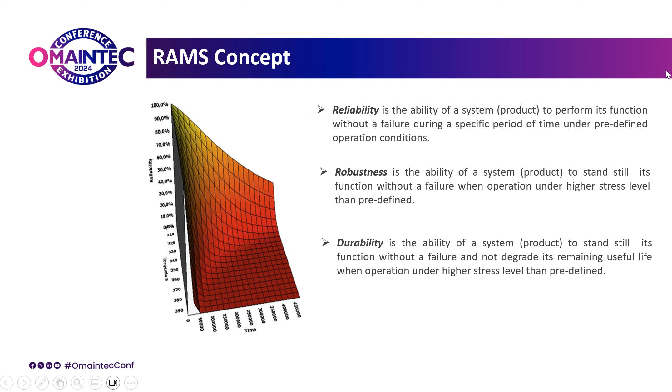Robustness is the ability of a system to sustain its function without failure when operated under a higher stress level than predefined. Durability is the ability of a system to sustain its function without failure and not degrade its remaining useful life when operated under a higher stress level than predefined. These three aspects are very important when we define and develop any products, and this also applies to infrastructure systems.

The main question that many infrastructure managers ask is why we need to implement a RAMS program for infrastructure systems. The first answer is that infrastructure systems are integrated with other systems and will affect system performance in case of unavailability or accident. This is the case for energy systems, for a nuclear power plant for example, or even bridges that can degrade.

This can cause a major accident in case of disruption. Civil infrastructure systems are safety critical by nature and may trigger major accidents in case of failure, as in the example I just mentioned about the bridge.

Communication and energy system infrastructure unavailability may cause a high impact on system availability and high loss of cash flow, and may also trigger major accidents.

Another aspect is that infrastructure systems are currently vulnerable to climate change and natural disasters, which requires a higher level of robustness. This is quite new, and new infrastructure system designers need to take into account that in the future these infrastructure systems will be vulnerable to climate change and natural disasters.

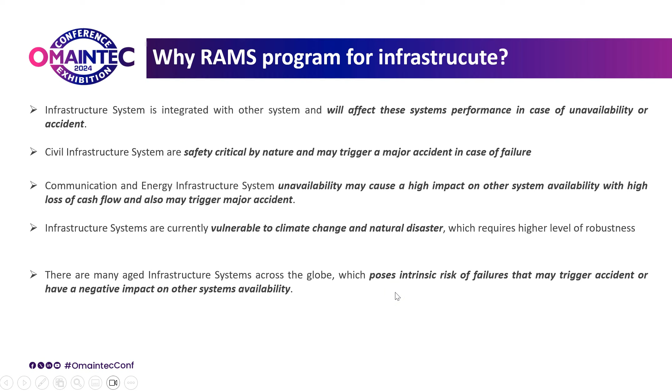Another aspect is that there are many aging infrastructure systems across the globe which pose an intrinsic risk of failures that may trigger accidents or have a negative impact on system availability. So these are the answers to why we need to implement a RAMS program.

To implement a RAMS program, the first step is to define the reliability strategy - vision, mission, goals and targets. After that, we need to have a program. A program has four pillars: reliability culture, leadership, organization structure, and resources.

Human resources - people who work in reliability, professional reliability engineers - you need to invest in. These engineers need training, need software, need to go to conferences to get new ideas, and so on. Those are the pillars for a RAMS program. If one of these is missing, the RAMS program is compromised.

In addition to the RAMS strategy and program, when you establish the RAMS program, you define all the procedures that serve as guidelines for reliability engineers for implementation. Then, as part of this procedure, are the RAMS methods that define the reliability requirements, the RAMS requirements, as well as verify if these requirements can be achieved based on the design configuration, the type of system, past data, and data provided by vendor suppliers.

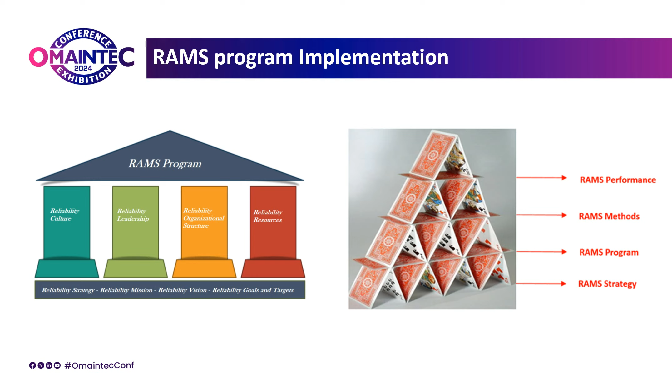And then based on it, we start to verify the RAMS performance achievement throughout the life cycle, of course in design phase, but we validate that during operational phase. It's important to understand that such RAMS methods are applied along the life cycle. In the very beginning, we define the strategy of your physical assets.

Then you develop this asset strategy and targets throughout different system levels. Then during the design phase, we start to define equipment level of concern RAMS requirements, and to do that you need to apply different reliability methods. Then you verify these targets in a lower level, and you also do bottom up and top down. First you start with top down requirement definition, but here you can start to verify your system in high level when you do some bottom analysis at equipment level.

And then, of course, during operation, whenever necessary, we implement some of this method, but currently here what you used to do is follow up your warranty terms based on performance and constantly have your FRACAS system, your reliability analysis, to verify this performance.

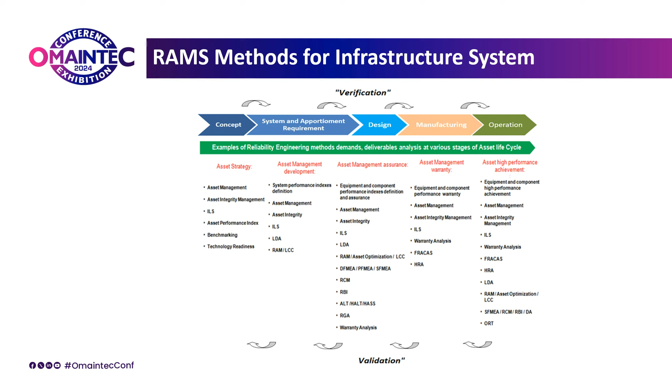A very important aspect is that such reliability methods are always linked in different phases. So the RAMS model that you do in concept phase will go in more detail at system, equipment level, and design phase. So you use this model and update it in the design phase. In the design phase here, you perform FMEA, that is the input for RCM.

And the RCM, that maintenance preventive task, will be the input for the RAMS model. And the RAMS model will be the input for the LCC. And all this RAMS model and LCC will be the base for the warranty definition and will be verified during operational phase.

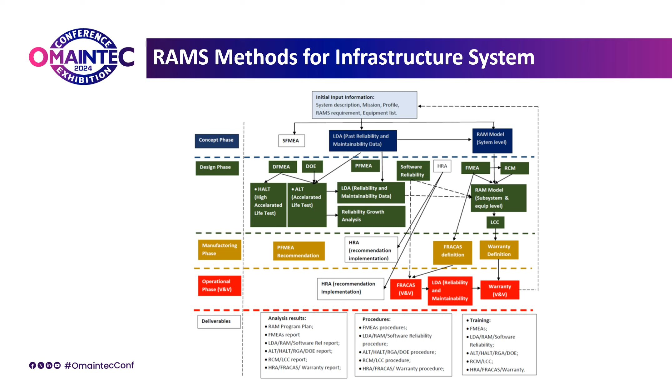Similarly, we have the FMEA that will be the basis for the FRACAS codification, and then the FRACAS will be, during manufacturing or before the operation, defined and established, to follow up the system performance during operational phase. So a very important aspect is to understand that all these methods are linked throughout the life cycle phase. So let's take a look at some examples.

Basically, we have qualitative and quantitative reliability methods applied for infrastructures. One example of a qualitative method is failure modes and effect analysis. Basically, this method identifies the system infrastructure. The subsystem is a bridge.

The subsystem has different parts here. So if you get the pier, we have a failure mode. We have a cause of the failure mode, and here you can see that we have a consequence, a possible collapse. So that's very high level, and we need to mitigate this risk based on some actions.

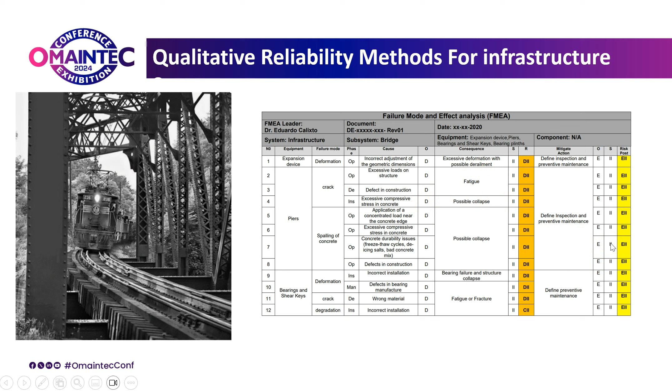In this case, we define a preventive maintenance action. Then we consider here that if we perform a preventive maintenance task, an inspection, we are able to identify these failure modes and avoid this consequence. And that's what will be the next step: that will be RCM. So we do that for all the bridge parts.

So we go through the RCM, and the RCM uses the same structure, the same definition that we had in the FMEA. And then what we basically do here is define, for example, in the case I focused on, the pier crack, I have the type of maintenance and when I will perform each type of maintenance, and at which frequency, to identify this failure mode here.

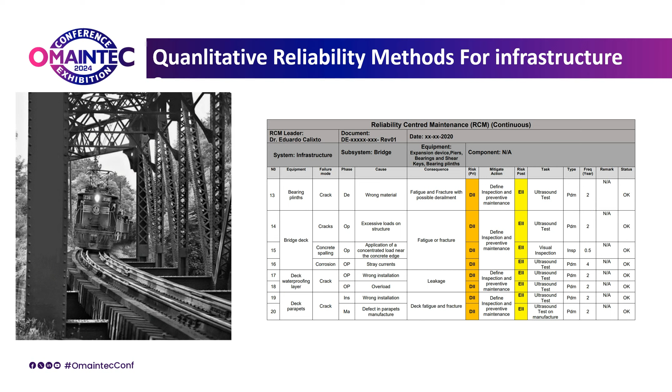And then, of course, I can use this type of task here in my RAMS model. So the RCM is applied for the whole system and uses the FMEA as a base. So these are qualitative methods. We also have quantitative methods.

So here, one example of one of the most important reliability methods is lifetime data analysis. Basically, what we have different here is that for usual components and equipment we get time as a parameter. But here we get what we call million gross tons.

Million gross tons is applied to assess the stress, the load on a track. So this is an example of a rail track. We consider along the time how the load on this track behaves. We can have a 50 kilometer track, a 10 kilometer track, or whatever, but we know the load, and based on the load, whenever we identify some failures, we identify what the load was.

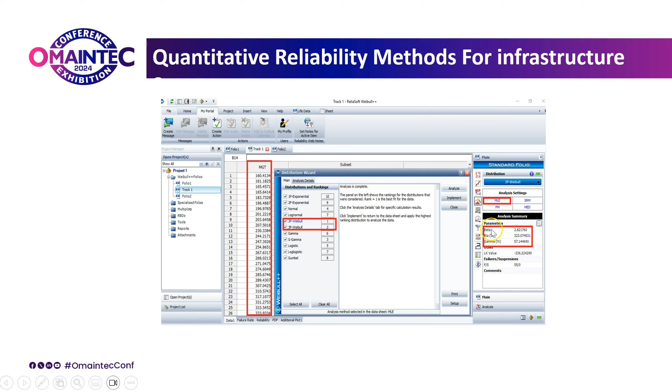And then based on it, we can basically implement a goodness of fit in the map to define which is the best PDF. Here it's Weibull, 2 parameters or 3 parameters, and here we can define the parameters. So since we define the parameters, we can automatically define the reliability along the time.

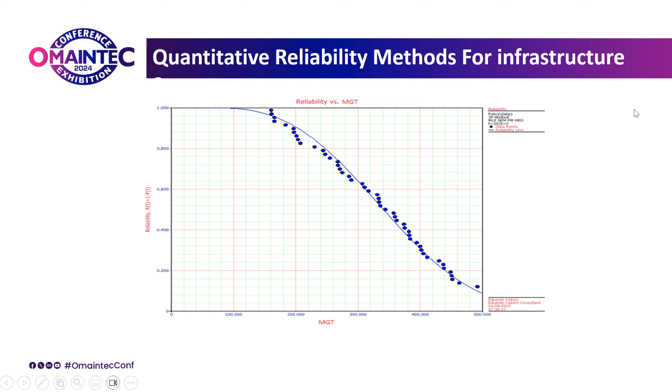Then we can see here, for example, that around 100 MGT we have 100% reliability in this track. After that, reliability starts to decrease.

Another quantitative method that we can use is what we call probabilistic degradation analysis. The difference here is that I use the input from preventive maintenance non-destructive tests, that's when I measure the crack in this track.

For example, in this case I have 5 points of measurement, and I start to measure the crack evolution. I have a limit crack that I consider a failure, that is 10 millimeters, and then of course, whenever I take a measurement, I have the MGT reference value here.

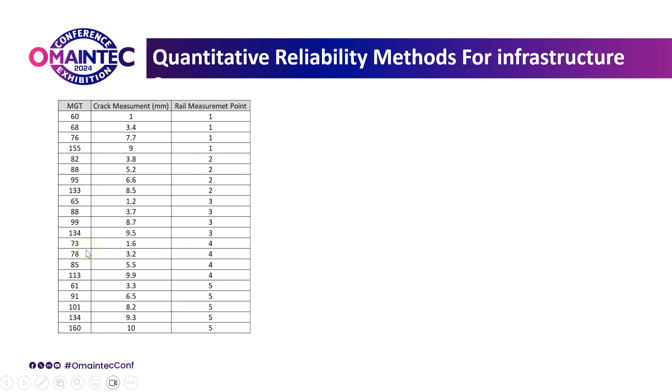So what I'm going to do now is to plot the trends that each one of these measurement points have to achieve this 10 millimeters. And then I perform a goodness of fit test to perform this assessment, and then I'm able to predict the trends for achievement for each one of these 5 points when they will achieve the 10 millimeters.

And here I have the MGT time. So for example, if here we have the limit one, and I plot the trend for each one of these 5 measure points, that's represented by 5 different colors. So if I take this example, this point here, if I plot on the x-axis, I will have the MGT value. So if I do the same for the other 4 points, I will have 5 points. With 5 points, what I can do is predict my reliability.

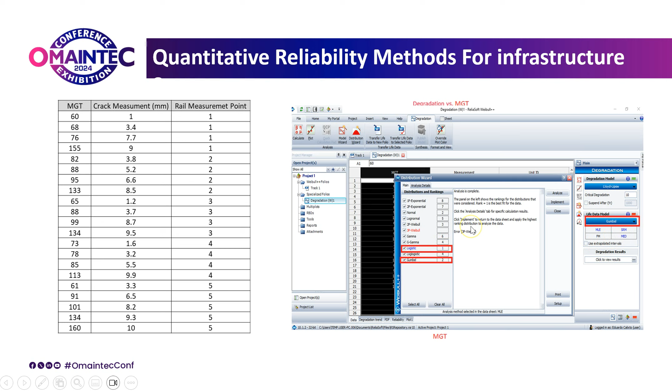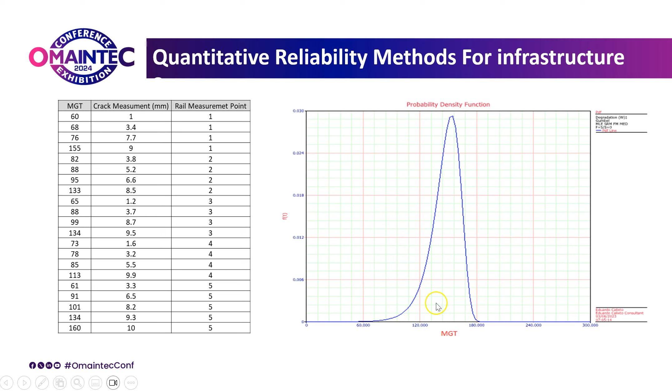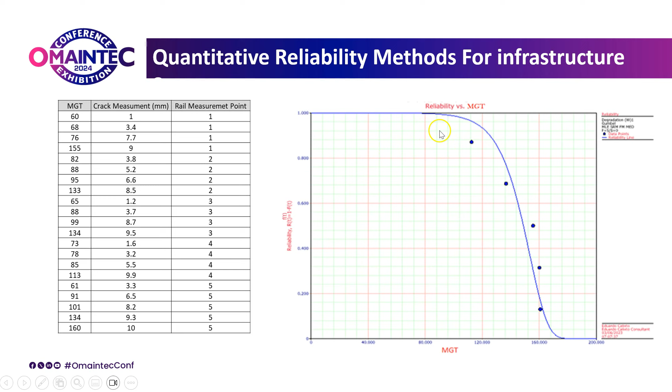So basically, I come back to the previous methodology now. With the MGT values, I perform the goodness of fit test, and I will check which are the best PDFs that fit my data, and based on it, I can have my probability density function that shows me that this is the Gumbel one, which shows the high chance to have a failure, a functional crack, in this track between 120 megatons and 180 megatons. And then of course, if I have the PDF, I can also plot the reliability, which basically shows me the probability that the system has to operate 100% until 80 MGT.

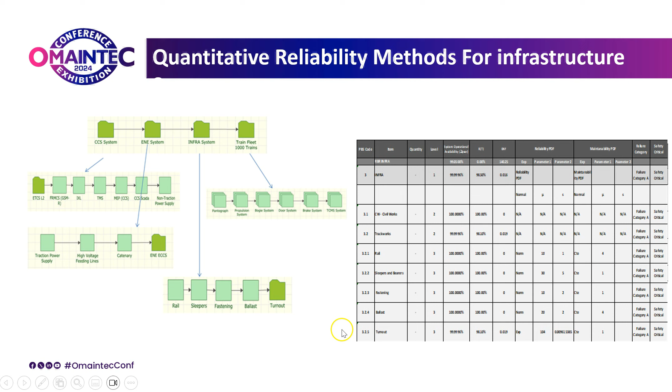Another method is of course the RAM analysis that has reliability block diagrams. Each block represents one system. This high level means my whole infrastructure system will shut down if one of the systems shuts down. And then I go deeper in this level, and then of course I'm in the concept phase. I'm starting to define my requirements, my reliability requirements, operational availability requirements, the time, the reliability requirements, expected number of failures. Then I can go deeper. So here, for example, is this infrastructure system, and I start to define it to a lower level.

Then, of course, I will perform a simulation. I input all preventive maintenance inspections, reliability, PDFs, data parameters, and maintainability parameters. And then when I run the simulation, the system will start to plot the failures, or if I have preventive maintenance, when the preventive maintenance takes place to avoid the failures. In the end, I have the number of shutdowns, and that's how the system calculates the reliability.

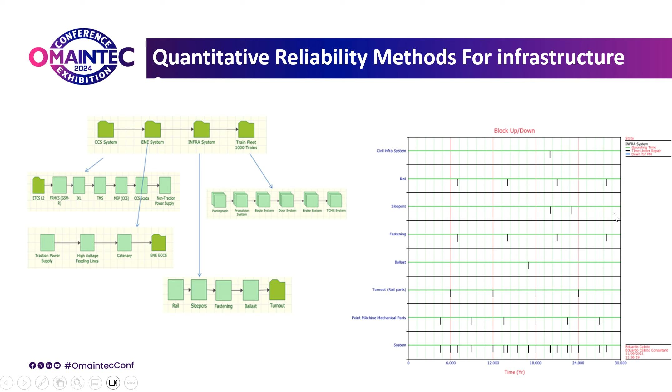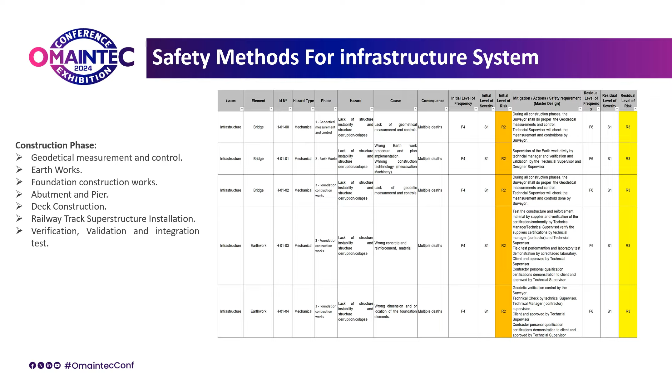And then to mitigate that, we need asset integrity management. And this asset integrity management is a combination of safety management, risk management, as well as maintenance management, that's including reliability. So we have here preventive maintenance and reliability inspection tasks, and we also need to consider the human factor of our teams to avoid human error that can trigger a major accident.

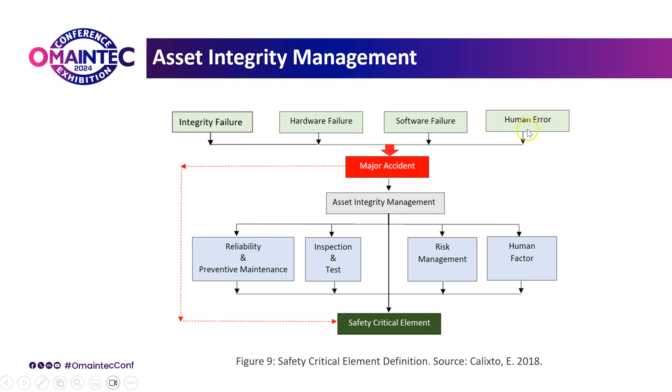And those are the elements that we have in asset integrity management. Another very important aspect is that nowadays we are able to incorporate artificial intelligence to measure the performance of our integrity systems, infrastructure system integrity.

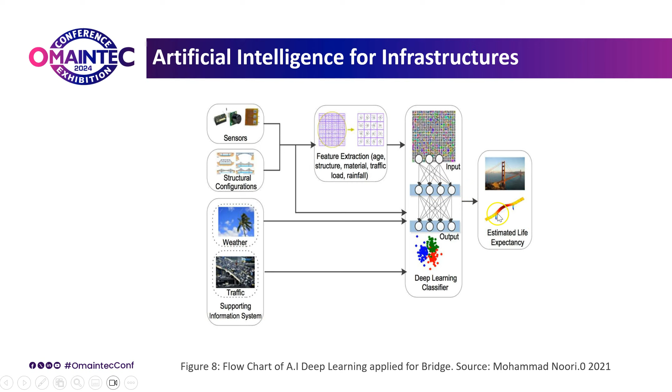So we need to incorporate artificial intelligence as part of asset integrity.

Whenever we have failures, degradation, or incidents, we put this information in our failure reports. Then we have a summary in our anomaly management system. We classify the risks for each anomaly, and we prioritize actions. And of course, in terms of safety, we have a defined barrier system.

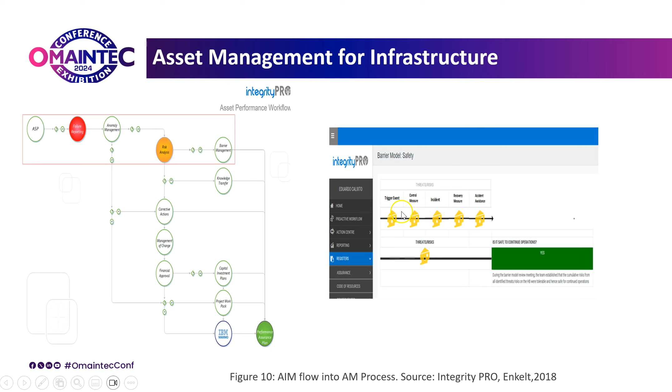The barrier system will be able, for all critical elements, to mitigate and to have a graphical vision of the impact of the system.

Then, as defined before, we have a list of inspections. This is an example for a railway system that we need to perform along the time, and we check and manage that along the operational phase.

Additionally, it's very important that we have our prognostic health management, monitoring critical safety elements and the remaining useful life, the states of health, and in addition we have reliability 4.0.

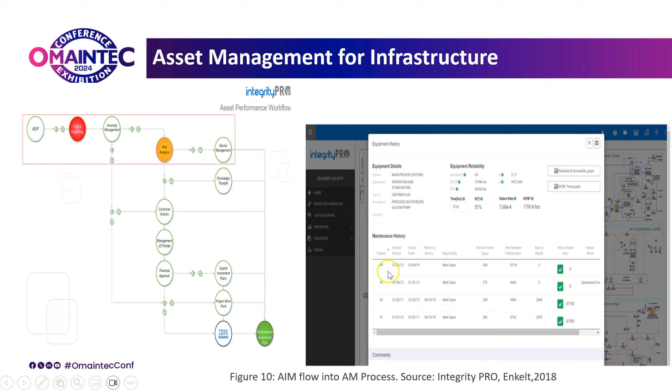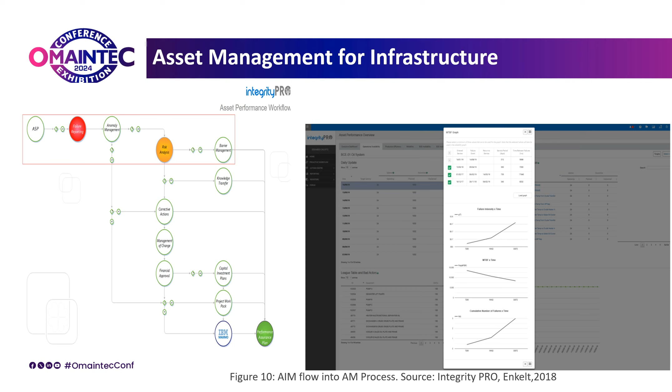That's basically whenever we have data in our FRACAS system, the system will be able to automatically calculate the reliability index and plot the graphs. That avoids complex calculations, using different software and so on during the operational phase, and it's easier for technicians and operators to understand. You don't need to calculate the reliability because it's automatically calculated.

So let's jump to the conclusion. RAMS program implementation for infrastructure systems requires a culture for excellence and high performance achievements. For infrastructure systems, or any other system, this excellence culture to develop reliable, robust, and durable products that have high performance and no early life failures is very important.

Without this culture of excellence, there is no culture of reliability. Reliability and excellence are strongly associated. The second point is RAMS program implementation for infrastructure is still a huge challenge, due to lack of risk perception and the belief that such systems will never fail.

That was one of the points where I strongly faced resistance when I worked here in Europe on a major infrastructure system project. High level organizations have this belief that the infrastructure system will never fail, or will hardly fail, and because of that we don't need to invest effort in RAMS program implementation.

Another aspect is that RAMS program implementation starts from strategy definition, vision, mission, goals, and thereafter the RAMS program elements must be constantly supported by high-level leaders and the organization.

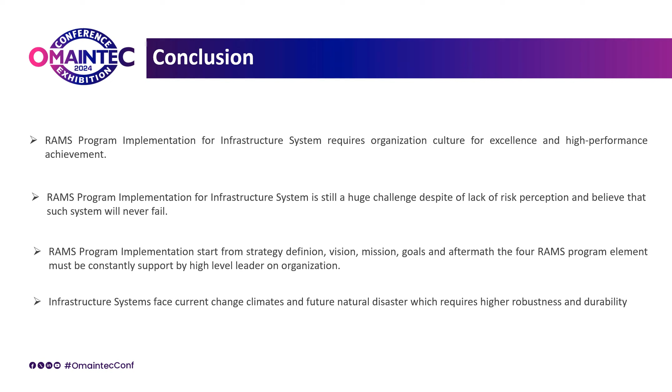Unfortunately, the old school mindset in many projects is that you need to deliver the project as fast as possible to make cash flow. But unfortunately, if you want robust and durable infrastructure systems that will face this climate change and future natural disasters, you need to spend more time designing, more people, and of course more investment.

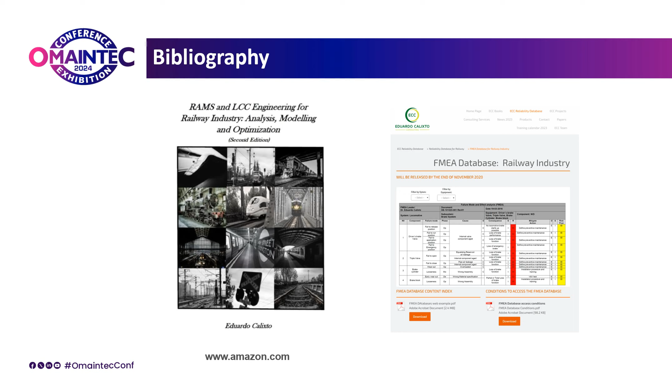So the bibliography for this presentation is in my book, RAMS and LCC Engineering for Railway Industry Analysis Modelling and Optimization, second edition, available electronically on Amazon. And of course the FMEA and RCM examples for railway industry are available in our database, as well as for oil and gas process. We have two databases, one for railway and another for oil and gas.